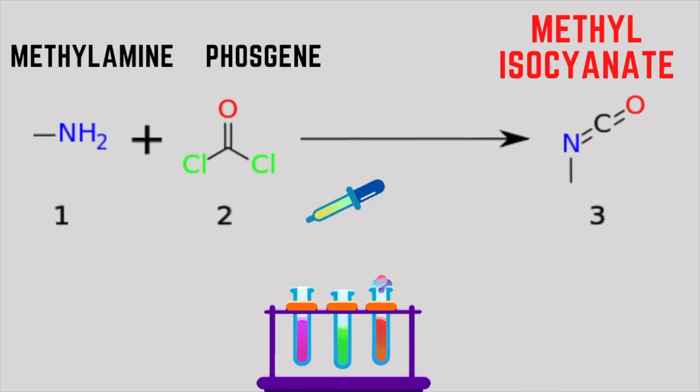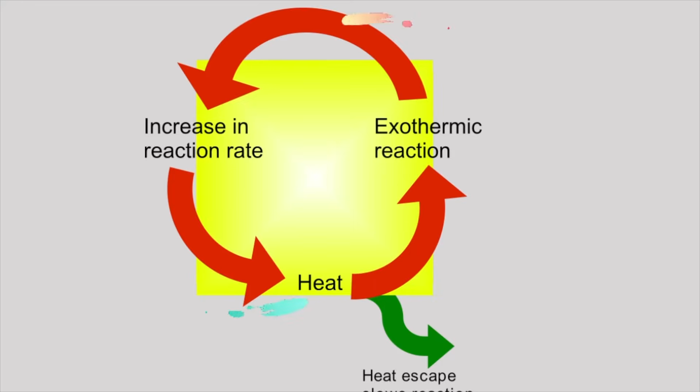When humans are exposed to this toxic gas, it can cause severe eye irritation, breathlessness, vomiting, ultimately leading to death within hours. It also has another important property. It is soluble in water, but also reacts very aggressively with it. Contact with water causes liquid MIC to heat up, boil and vaporize, resulting in severe heat expulsion causing a runaway exothermic reaction. As methyl isocyanate or MIC is a highly volatile gas, there were specific guidelines regarding its storage.

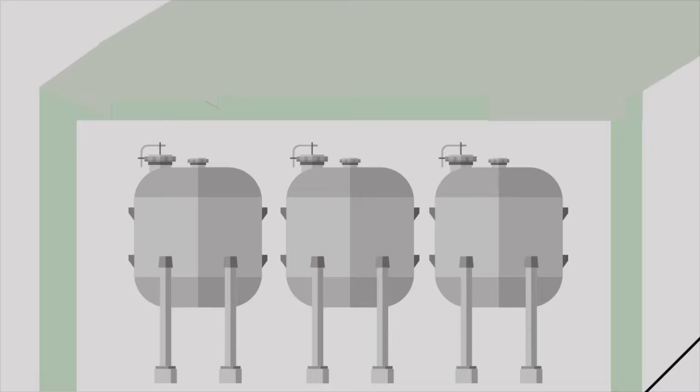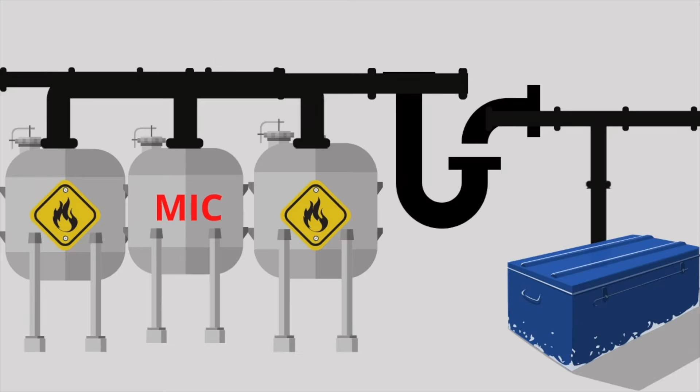The company had 3 underground storage tanks which stored MIC. One tank among them should be kept empty as a backup, so that it could store the excess gas from a nearby tank. The storage tank should maintain a level of MIC less than 50%, by pressurizing it with inert nitrogen gas. This pressurization allowed liquid MIC to be pumped out of each tank as needed, and also kept impurities and moisture out of the tanks. A refrigeration system meant to cool tanks containing liquid MIC.

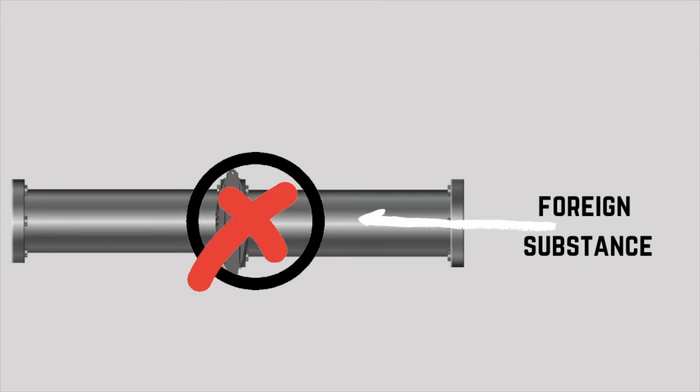A slip blind, which acts as a watertight seal within a pipe, preventing the entry of any foreign substance into the tank through the pipe. A vent gas scrubber, which is a large tank to collect any accidental gas leak. It then converts the toxic gas into an inert one by forcing it through columns of caustic soda. A flare tower, which can burn any accidentally leaked MIC, thereby preventing it from escaping into the air. Numerous water hoses were placed around the emergency vent, so that workers could spray water on any escaping gas. MIC dissolves in water, and by creating a water curtain, the workers could control any leak.

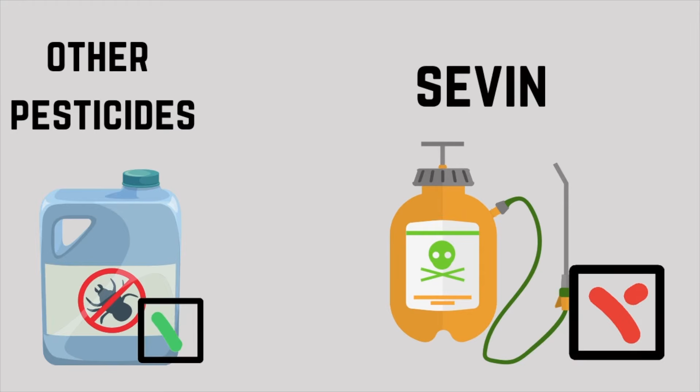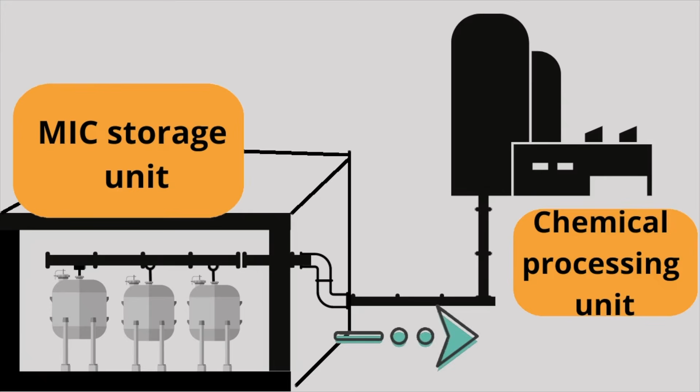So back to our story. By the 1980s, the company was not generating as much profit as they expected. Many Indian farmers preferred other pesticides over Sevin. The company decided to cut down their expenditure in certain areas. They underinvested in safety management in order to save money. These included lack of skilled workers, insufficient maintenance and inadequate emergency action plans. The Bhopal facility housed 3 underground liquid MIC storage tanks. The company installed a pipeline as a shortcut from the MIC storage unit to the nearby chemical processing unit.

By late October 1984, Tank E610 lost the ability to effectively pressurize with nitrogen gas, which meant that the liquid MIC contained within the tank could not be pumped out. MIC accumulated inside the tank way more than 50%, and could not be pumped out. MIC is a dangerously volatile chemical, and these tanks were supposed to be kept cooled to 0 degrees Celsius. A refrigeration system meant to cool tanks containing liquid MIC was shut down in order to cut the cost of freon gas.

Along with it, the flare tower, to burn the MIC gas as it escaped, had a connecting pipe removed for maintenance and was shut down. Many vent gas scrubbers had been out of service due to poor condition. There were many incidents of minor leaks even before, with which the workers were familiar. All these events made the ideal background for an inevitable disaster.

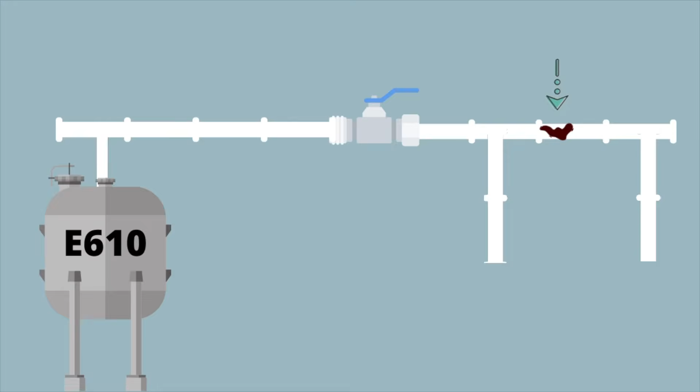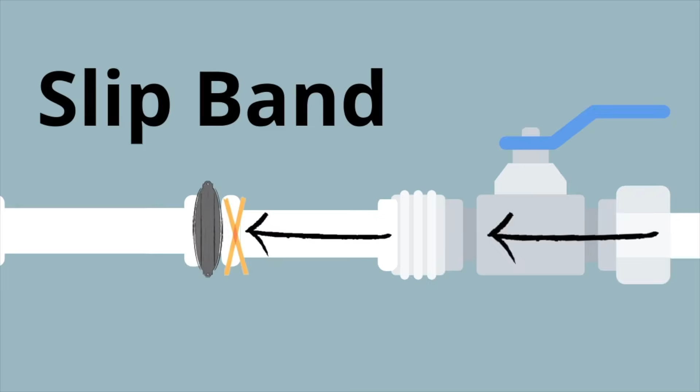On the late evening of December 2, 1984, operators tried to clear a clog within a pipe, which connects the MIC tank to the plant's main piping system, by flushing contaminants out with water. But the valve which prevented the backflow of water to the tank was found to be faulty. Even if the valve fails to function properly, there was another safety measure known as the slip band, which could have prevented the water entry by forming a watertight seal between the pipes. Unfortunately, this was also not installed, which helped the water to enter through the pipes.

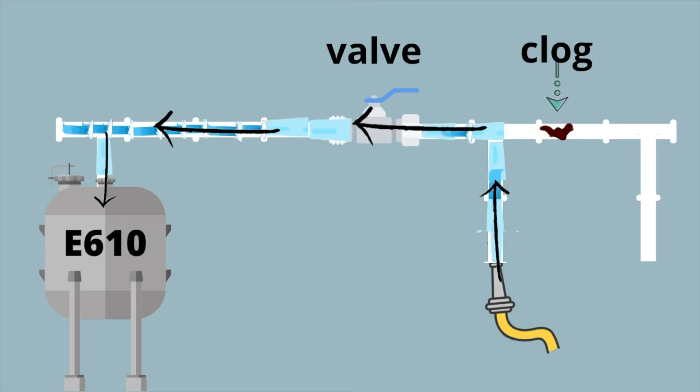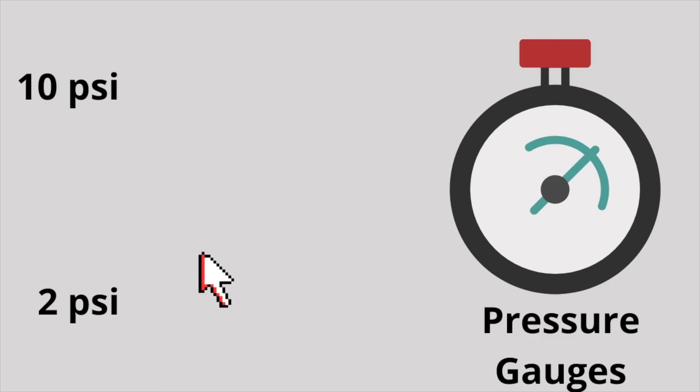Water eventually reached the storage tank E610, which had lost its ability to effectively pressurize nitrogen gas. Now 42 tons of methyl isocyanate had been exposed to water. By 11:30 p.m., the pressure gauges connected to the tank reached 10 units from 2. It was initially ignored by the operators as they presumed the gauge to be faulty.

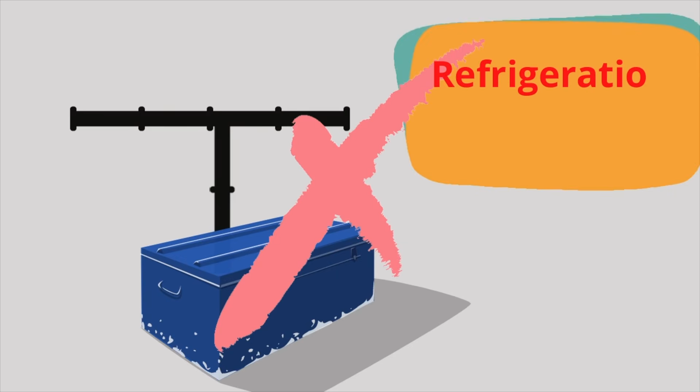MIC began to react aggressively with water, resulting in heat generation. Within minutes, the reaction mixture inside the tank began to warm up. This process could have been delayed if the refrigerating system was functioning properly, but it had been switched off months earlier to cut down the cost. Soon, the thermal runaway reaction took place. By 12:20 a.m., the pressure reading inside the tank showed more than 50 units.

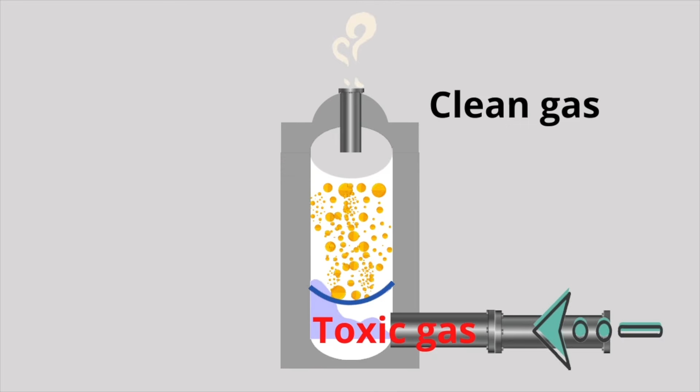The operators rushed to the storage area. The concrete slab under which the underground MIC tank was placed was vibrating violently. Soon they realized the actual condition inside the tank. Hot MIC vapor burst through the tank's automatic pressure relief system. By 12:30 a.m., operators initiated the emergency responses to neutralize the gas. They tried to activate the vent gas scrubber, but it had been deactivated at the time, and had insufficient caustic soda to neutralize the leaked toxic gas.

Then they tried to kickstart the flare tower, to burn the MIC gas as it escaped. But at that time, it was disconnected from the plant pipe system for maintenance. At that point, nothing could have been done to stop the release. An employee triggered the plant's alarm system at 12:50 to alert the public. But it was too late. Tons of toxic gas had already escaped into the air. The highly toxic substance made its way around small towns near the plant.

On that night, about 3,000 people were killed instantly, condemning many others to a future of prolonged pain, cancer, genetic disease and much more. Even today the scale of their sufferings has not eased. Meanwhile, Union Carbide Corporation argued that water entered the tank through an act of sabotage. Water entered the tank when a rogue employee hooked a water hose directly to an empty valve on the side of the tank.

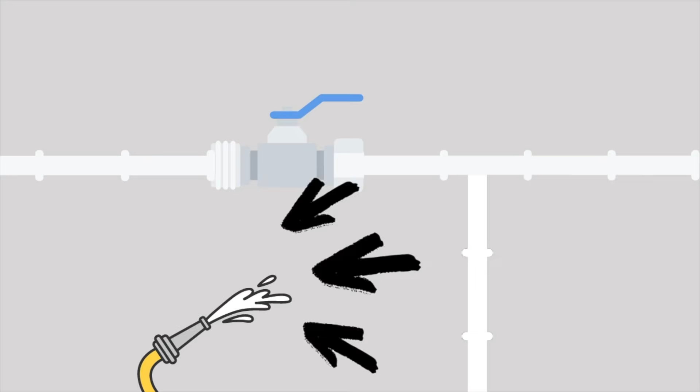Many legal battles were fought against the Union Carbide Company and the employees for years. The extradition of Warren Anderson, who was the CEO of the company at the time of the disaster, failed. In 2010, 7 former employees of the plant were convicted for death by negligence and sentenced to 2 years imprisonment and a fine of about $2,000 each.

Several rights organizations have been, for decades, demanding harsh punishment for those responsible for the tragedy, adequate compensation to the victims, a proper rehabilitation plan, adequate medical facilities for survivors, and removal of toxic chemicals lying on the plant premises, among other things. But the wait for justice for the survivors of one of the world's biggest industrial catastrophes still continues.